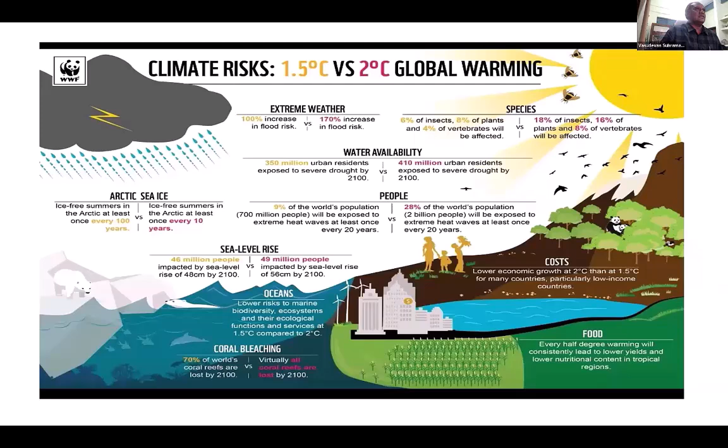In 2100, if you allow global warming, 410 million urban residents will be exposed to severe drought, and also Arctic sea ice melting, and 28% of the world population will be exposed to extreme heat waves and lose their lives, and sea level rise, coral bleaching, and also food and the cost. So if we are not able to go with hydrogen, this climate risk will go ahead. Otherwise, because of hydrogen implementation, you can avoid the temperature rise of 1.5 degrees centigrade and above.

Normally, you can see the natural greenhouse gases like CO2 and CH4 will be a barrier in the earth's atmosphere. Because of these greenhouse gases, our earth is warm enough. That means we need the natural greenhouse gas. But the human-enhanced greenhouse gas is creating the problem, because the CO2 will hold the heat and will not release it. So we need greenhouse gas, but not too much of it in the atmosphere. For example, you can see the sun's energy passes through the car's windshield.

The heat will be inside, so that means you cannot live in the car because of the heat. So the same principle will be in the case of Earth.

Climate change is increasing the frequency and intensity of lightning strikes and thunderstorms, which can lead to more effect in the case of the intensity of lightning. Almost 7.4 to 8 lakh people are dying in the case of the heat wave.

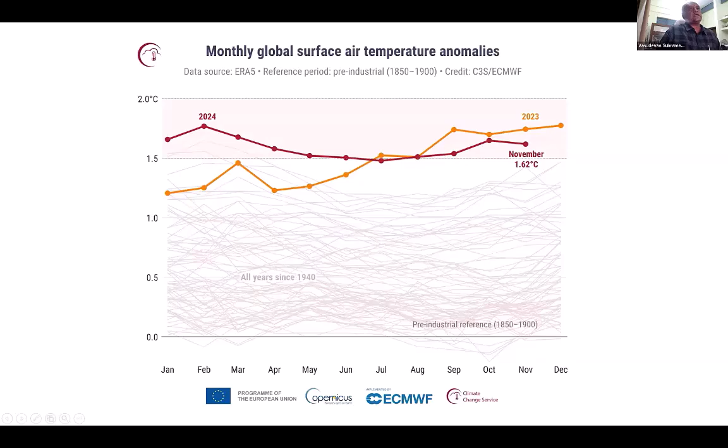So you can see it going on increasing and decreasing. Again, in the case of the November month, the temperature increases 1.62 degrees centigrade because of global warming.

Even if you do not obey this 1.5 degrees centigrade limit, there is formation of this type of atmospheric river. If the atmospheric river happens, there is heavy rainfall in a short time. We have experienced in India and many places this type of burst in atmospheric rivers, causing heavy rain.

So you can see the flood will increase, forest fire will increase, ice melting will increase, and sea level will rise.

These are the consequences we have to face if we are not using green or renewable energy like hydrogen. If you go for green or renewable energy, there are multiple options, like chemical energy storage, for example these type of batteries and advanced chemical energy storage, CO2 battery and flow batteries, and gravitational energy, thermal energy and compressed air energy like that.

But today I am going to talk more about the hydrogen based energy system, particularly how to produce green hydrogen and its application.

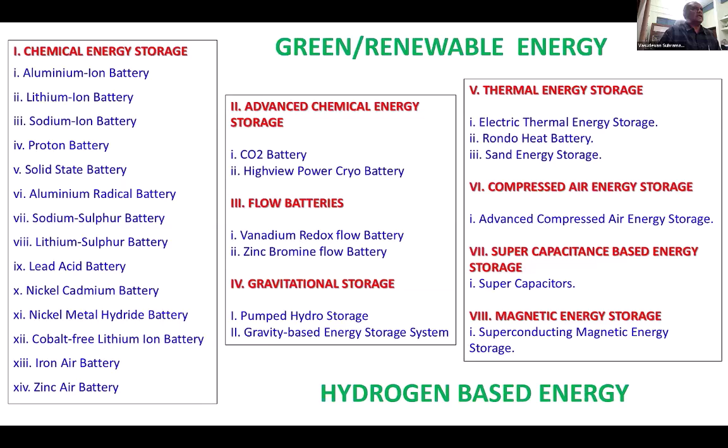Earlier there was a fight between the batteries and fossil fuels. Now hydrogen is fighting with batteries and fossil fuels. Why? Because hydrogen is the magic green fuel. It will be utilized in many places of application.

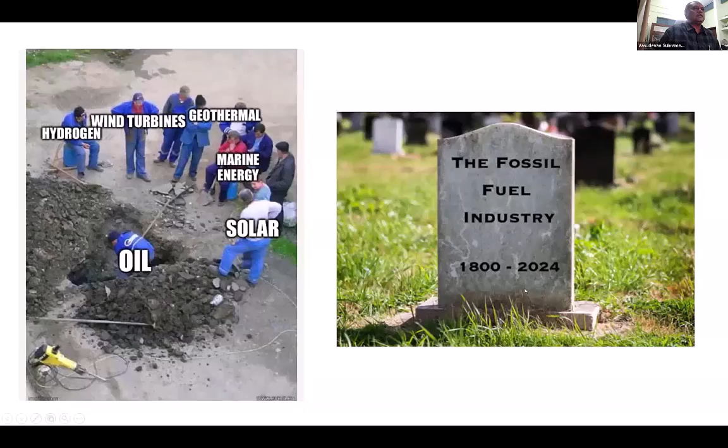So you can see the renewable energies like hydrogen, wind, geothermal, every energy is burying oil. So the fossil fuel industry is almost over. This is from 1800 to 2024.

So beyond 2000, we are completely going towards the hydrogen age. So this is another typical figure.

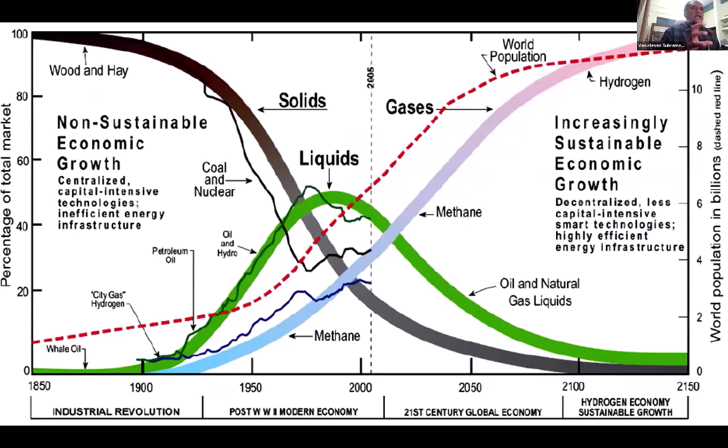You can see solid fuels going on decreasing in utilization, and liquid fuels utilization also decreasing. Only gaseous fuels will be utilized in the future as world population increases. These two graphs predict that hydrogen and other gaseous fuels are the future.

Supposing if you ask one question about renewables like solar and wind - because of the drawbacks like intermittent power supply in both cases, and in the case of batteries, how big you want and what is the capacity, there are so many questions.

That's why we are going for hydrogen energy. Also you can see hydrogen is multifunctional. It connects energy, mobility, and industry.

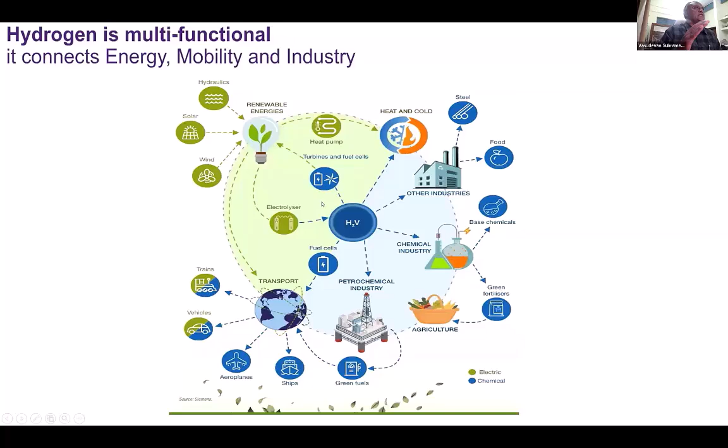So battery can't go for the industrial side. Hydrogen can be used for renewable energy and also green transport and also as green fuel for industry. That's why I'm telling hydrogen is multifunctional. It will always connect energy, mobility, and industry.

Scientifically, you can see that the energy density, that is the gravimetric energy density, is more in the case of hydrogen - it is almost 142 megajoules per kg, more than lithium-ion batteries. You can see the volumetric energy density in the case of liquid hydrogen is also more than lithium-ion batteries.

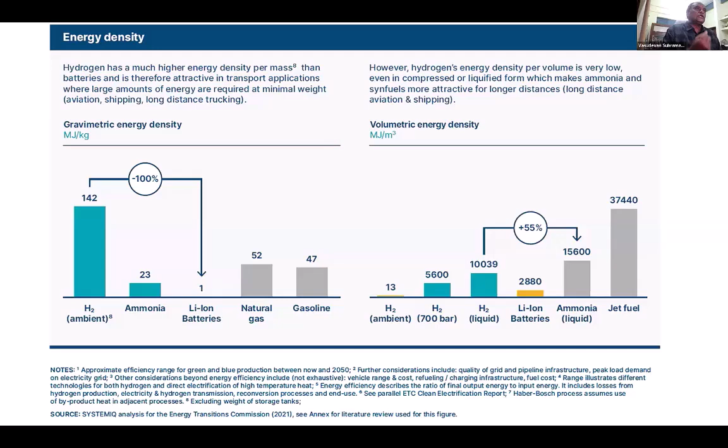You can see the scientific argument of hydrogen versus batteries. Both gravimetric energy density and volumetric energy density are more for hydrogen, so that's why it is an attractive fuel for the future.

There are many methods available for hydrogen production. The hydrogen source can be natural gas, liquid hydrocarbons, coal, biomass, or biogas - these are all the hydrogen source inputs. If you produce hydrogen with these methods, you need carbon capture systems. Natural gas needs CCS too, so in all these cases you have to put carbon capture systems for hydrogen.

But in the case of water, through electrolysis, you don't need any carbon capture systems. That's why the method of producing hydrogen through electrolysis is called green hydrogen production.

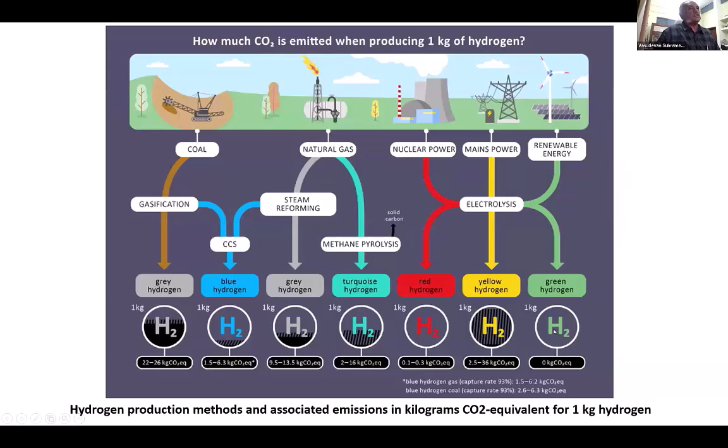If you want to produce 1 kg of hydrogen through electrolysis, there is 0 kg of CO2 equivalent. Cost-wise, there is coal-based, natural gas-based, and green hydrogen-based production. The cost is a little bit higher for green hydrogen, but the water consumption is also less.

Right now the hydrogen cost is more, but because of the reduction in renewable energy cost, the hydrogen cost is going to be less. That I can tell in the future slides.

In the case of electrolysis, there are many possibilities - solar pathways, high temperature pathways, and low temperature pathways. If you go for solar pathways, there is photobiological electrolysis and photoelectrochemical methods available for green hydrogen generation, or solar thermochemical water splitting.

In the case of high temperature, you can use heat from a nuclear source and go for high temperature electrolysis, but here you need very high temperatures like 600 to 1000 degrees centigrade. In the low temperature electrolysis pathway, you can use green energy and the temperature required is very, very low - I can say less than 100 degrees centigrade. So these are all the pathways you can use to produce green hydrogen.

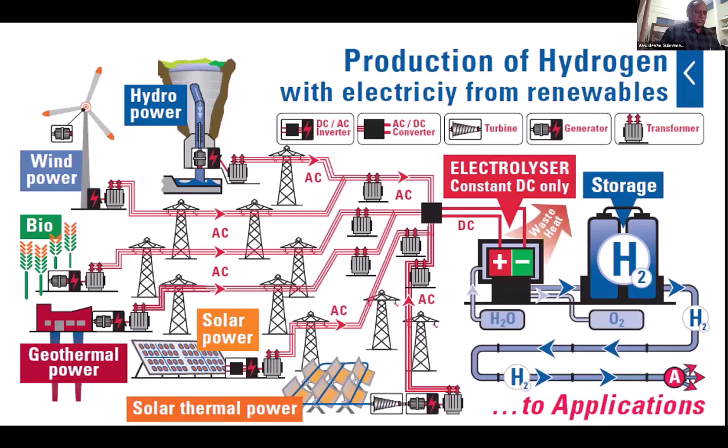There is another option of renewables where there is no electricity involved. I can say this is also called production of green hydrogen, but no electricity is required, though it is renewable. So my point here is that a physicist, chemist, or biologist - anyone can produce green hydrogen through their intelligence.

This is eye-opening for research scholars in any department. Concentrate on this type of hydrogen generation because India needs 5 metric million tons of hydrogen by 2030. If we are not concentrating on hydrogen, it is very, very difficult to survive on the Earth.

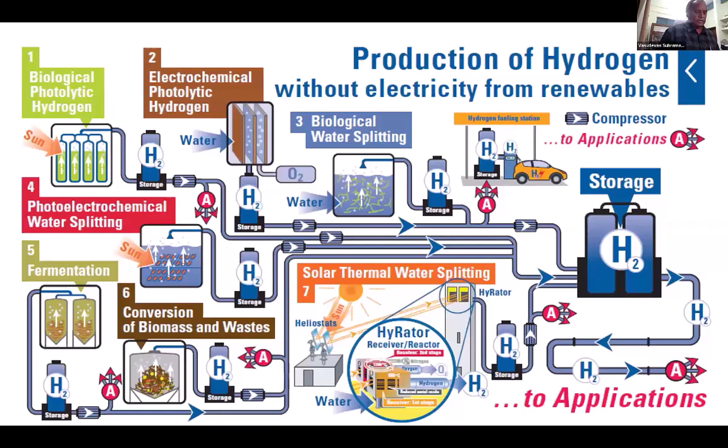Now I can come to what type of catalyst is used in the electrolyzer. Two types of catalysts are used in two types of electrolyzers: one is the alkaline electrolyzer or AEM electrolyzer, and one is the acid electrolyzer, or indirectly the PEM electrolyzer.

In the alkaline side, nickel will be the electrocatalyst in the form of porous or alloy forms, but the base is nickel. In the case of PEM electrolyzers, you can use precious metals like platinum and palladium. Platinum is the natural choice because of the higher exchange current density and very low overpotential at low current density. But the disadvantage is the higher loading required and also the high cost.

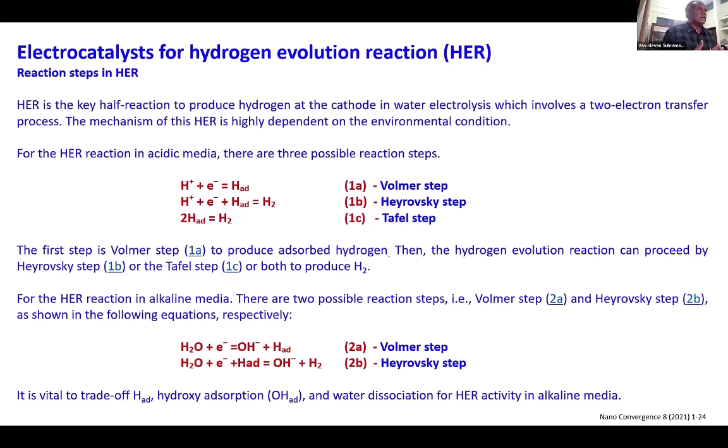Here again, the OER, that is oxygen evolution reaction, takes place on the anode side. Here the overpotential loss is more, that is 40%. On the HER side, the overpotential is less, but on the oxygen side, the overpotential is more, more than 40%. So now people are concentrating more on developing new anode catalysts to reduce the overpotential losses.

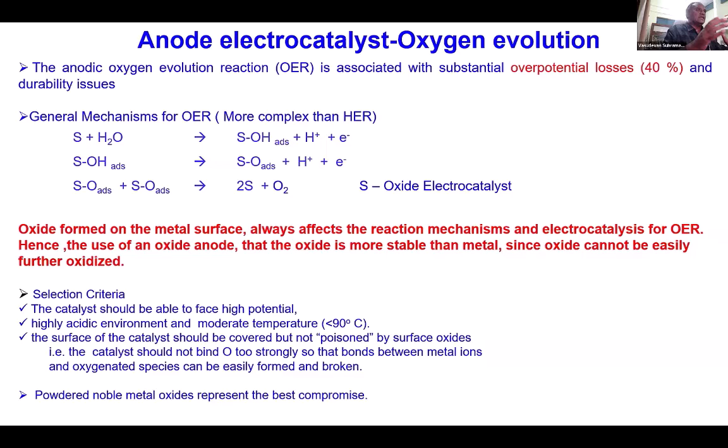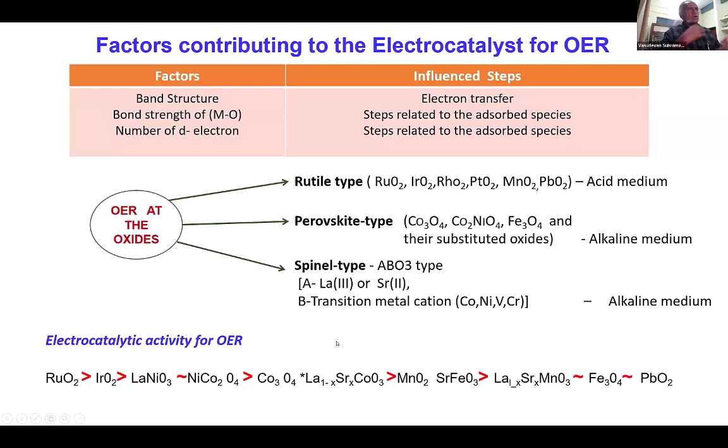And you can see the rutile type, perovskite type, spinel type. So these are all the possible OER oxide catalysts you can go for. The rutile type is used for acid medium, and perovskite and spinel types are used for alkaline medium. From the literature, the electrocatalyst activity goes RuO2, IrO2, like that. Now people are concentrating more on the oxygen evolution reaction than the hydrogen evolution reaction.

So now my point is, iridium is used on the anode side. There is no replacement till date. Small groups are working on it in many places and taking some patents, but in most commercial cells iridium is used. Iridium is one of the rarest naturally occurring elements; only a very small amount of iridium is available. And the catalyst made from iridium and platinum today is typically 65% iridium and 35% platinum.

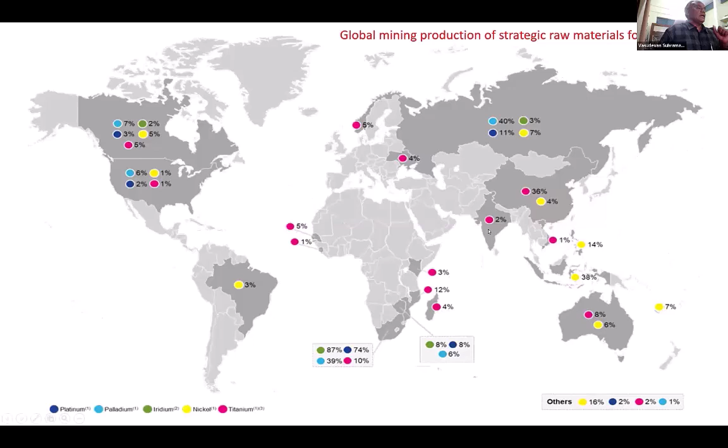So if we are targeting big electrolyzers, we need 20 tons of iridium, but availability is only 8 tons. So we have to go to non-iridium based catalysts in the future. This is one thought everybody has to keep in mind: if you are going to work on PEM electrolyzers, at the anode and the cathode you have to replace iridium and platinum. There are very few resources available in India, but in African and other countries the resources are more. So we have to target the Indian market with respect to the availability of metals in India.

Apart from these catalysts, another part is the current collector. On the hydrogen side, the electrode potentials are close to zero, so it is possible to use carbon-based materials such as carbon papers. But on the oxygen side, you cannot use carbon-based material because carbon corrosion takes place. So this is big research for the mechanical engineering department, to make proper current collectors, porous titanium structures replacing carbon, in the PEM electrolyzer. Chemistry can handle the anode and cathode catalysts; mechanical can take the challenge of these current collectors.

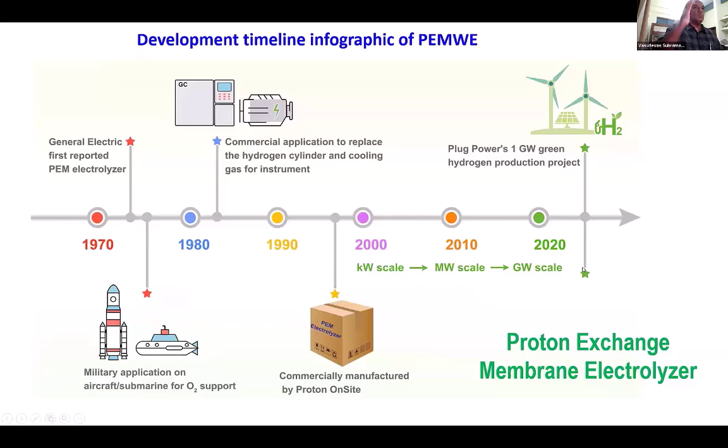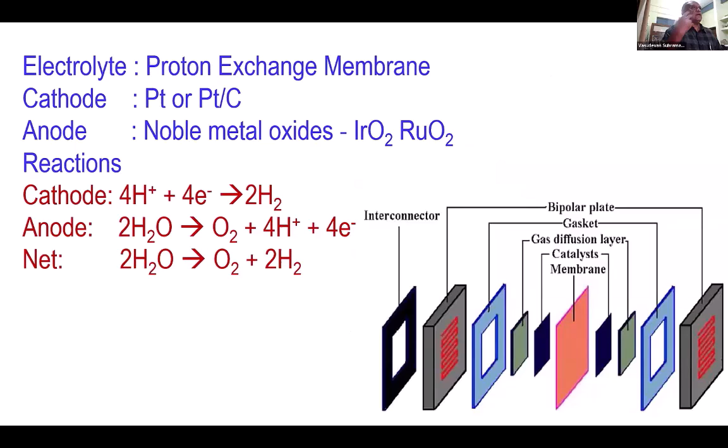So the PEM electrolyzer started in 1970 and has progressed step by step. Around 2020, kilowatt, megawatt and gigawatt scale started, because we need more green hydrogen; we have to go to megawatt scale. The fundamental is the proton exchange membrane electrolyzer, and CECRI is concentrating more on PEM electrolyzers. This is the membrane where water is split to the oxygen and hydrogen sides. The electrolyte is a solid proton exchange electrolyte, water is the reactant, noble metals are used, and hydrogen and oxygen are evolved.

In CECRI, we have made several examples. I can say more than 1,000 catalysts we prepared based on the carbon, and finally we optimized with the carbon-based platinum. This is one type of catalyst developed and patented by CECRI, and another one is the platinum, to how to reduce the platinum content in the cathode side. This is the typical method we are using, the deposition method.

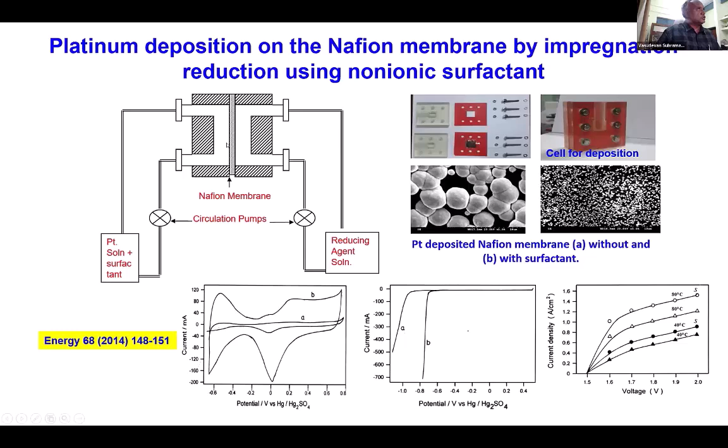How much platinum is required? So based on the performance, we can reduce the platinum content through the deposition method. In the case of the oxide side, we are still using the IrO2-based system only. I can say that we are still struggling to replace the IrO2-based catalyst, but slowly we will go to less IrO2-based catalyst.

So this is the first prototype developed in the years 1996 to 2000. It will generate only 0.02 meter cube of hydrogen. Here you can see there are membranes and both anode side and cathode side. As I said, these are all the current collectors and current distributors. So a very compact electrolyzer cell.

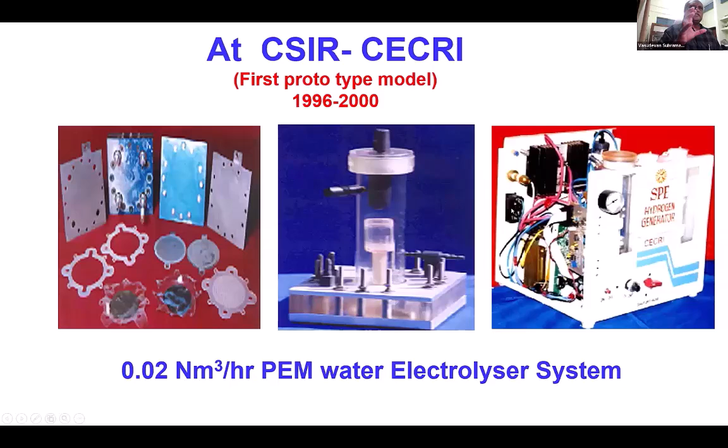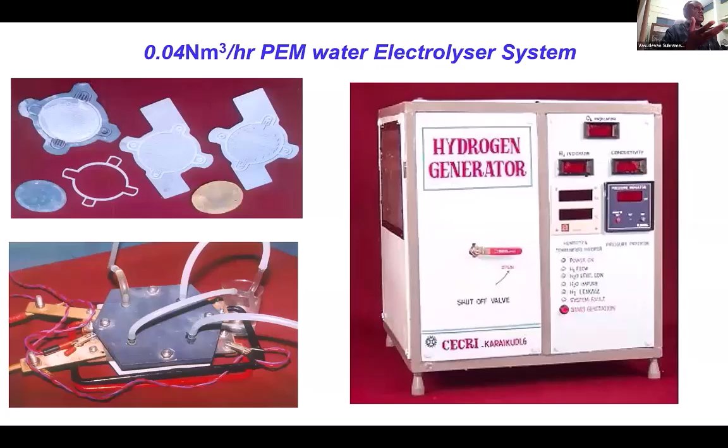Even though the green hydrogen concept started recently, we started in the year 1996 itself. So this is the first green hydrogen prototype model developed in CECRI in 2000. We did several performance tests like current, voltage, and duration. Apart from the knowledge based on the 0.02, we went a little bit higher. We were successful in this also, and then we went to 0.8 Nm cube. Here also we were successful, and we went for the complete system.

Here this is 1 meter cube of hydrogen, where it can produce 1,000 liters of hydrogen through the PEM electrolyzer. Earlier we made small things. Now we are able to make bigger size systems. In the case of the PEM electrolyzer, we have a lot of students working on this project. Apart from that, we also made separate cells for 2,000 liters, 3,000 liters, 4,000, and finally now in 2024, with great difficulties, we are able to do 6,000 liters of hydrogen.

In the future, within 2 to 3 years, we are planning for 20 to 25 Nm cube of hydrogen. We are getting projects from CSIR and MNRE for the higher scale studies. So these are all the technical specifications. We are on par with the international market. The thing is, once you have developed it, you cannot keep the technology to yourself.

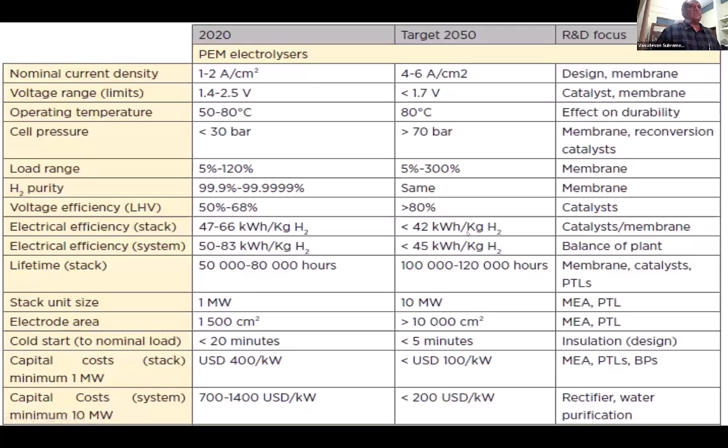Now we are utilizing our electrolyzer using solar as the energy source, because if you are not generating the hydrogen through solar, it is not green energy. We have started working on solar-based hydrogen energy. Still, the R&D focus will be there in the design of membrane, catalyst, and durability. So much R&D focus is needed to achieve the target of 2050. The Department of Energy, DOE, has given a very high target to achieve in 2050. CECRI is going towards the 2050 target.

So it is the integration of all the departments, like a private university has all the departments. So if you bring all the departments together and sit and work on that, definitely India can go for this type of electrolyzer system.

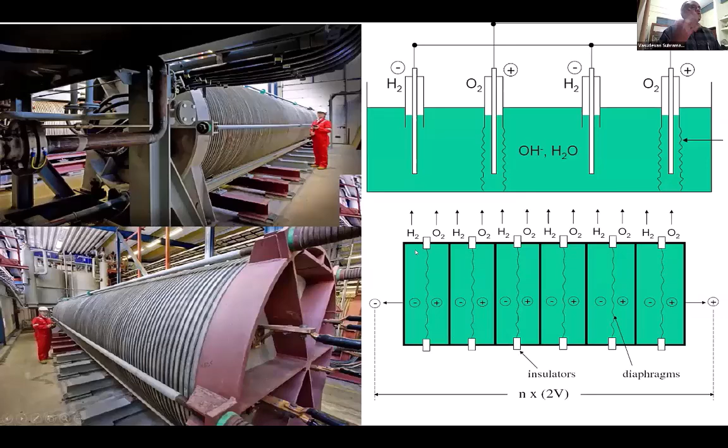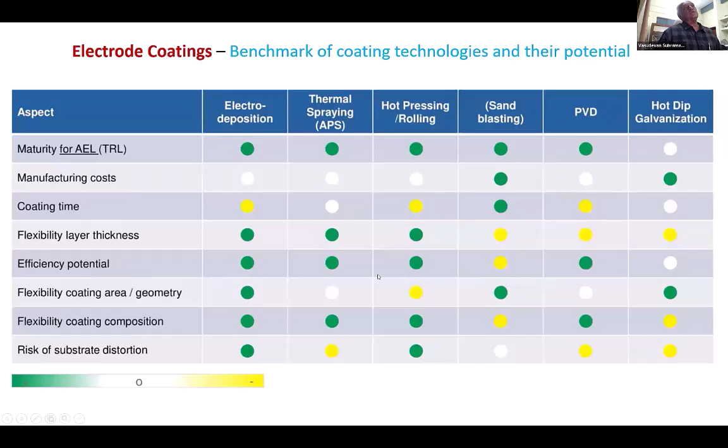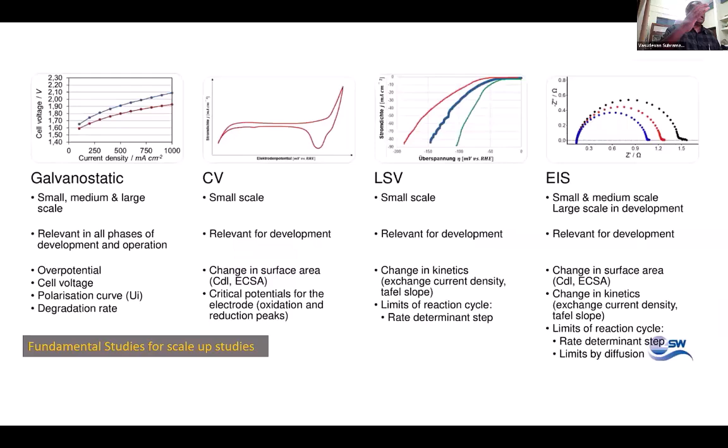So before going to pilot scale, you have to do many fundamentals like galvanostatic studies, cyclic voltammetry, linear sweep voltammetry, impedance studies. So if you want to develop the catalyst, you have to go for this type of characterization. And the question is whether nickel is available; yes, plenty of nickel is available. That's why now the world is concentrating on the alkaline electrolyzer rather than the PEM electrolyzer.

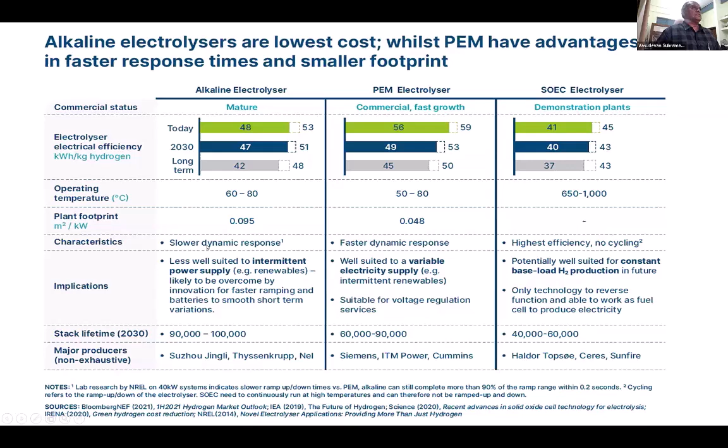And another question is whether water is available for alkaline. Even in the case of many hydrogen production systems, water is needed. Like that, you need water for the hydrogen system. Enough water is available for the electrolysis of water.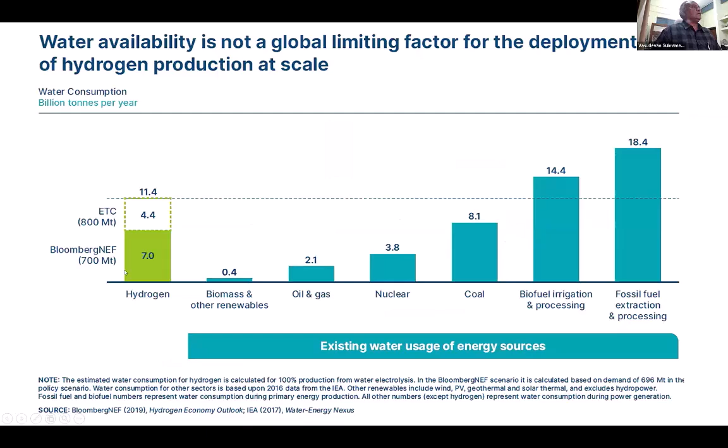So initially, in the case of the alkaline electrolyzer, we developed only the electrode rather than the electrolyzer. After the development of the indigenous electrode, the technology was immediately transferred to the existing electrolyzer manufacturer. Then we started our own electrolyzer system with many components. We developed the 5 kilowatt system as a demo model, and now we are going for the 50 kilowatt alkaline electrolyzer. Like PEM, here also we need the entire system, like balance of plant and the electrolyzer. Here also all the engineers and scientists will work on this type of system.

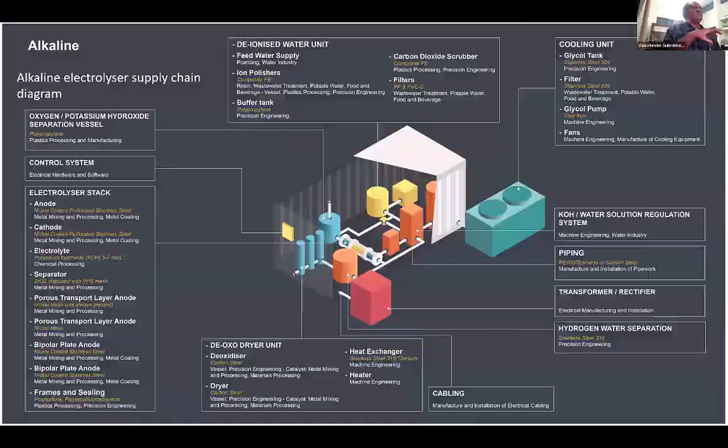Here we are not at all working on high temperature electrolysis. As I said, here we need high temperature; if waste heat is available, then you can go for high temperature electrolysis.

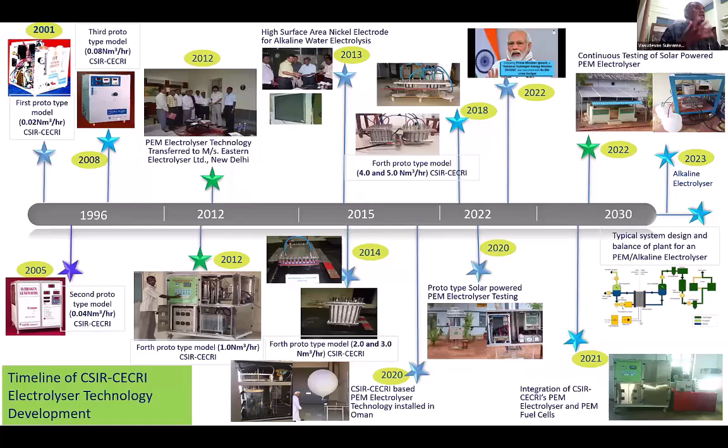Here also the same. So you can see the timeline. We started in 1996. We have been slowly developing through 2012, 2015, 2022, and into the 2030s. We are going to meet India's requirement of 5 MMT of green hydrogen. So this is the timeline. It is not just like that we started this work. It is 30 years of work we have done on the PEM electrolyzer system.

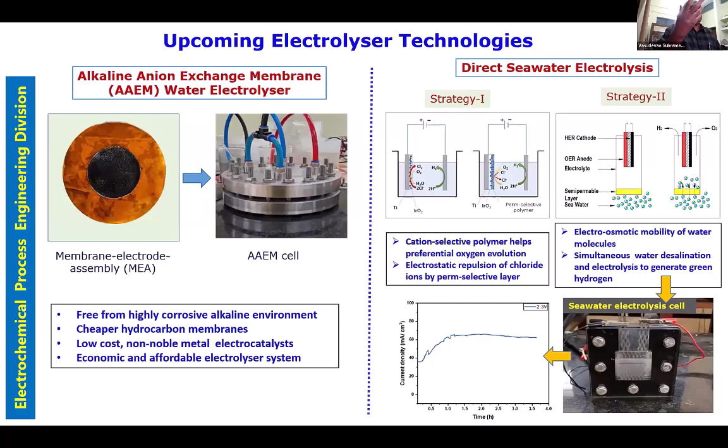Apart from PEM, we are also concentrating on replacing the 30% KOH with an alkaline anion exchange membrane. Like PEM, here also you can use the AEM, you can use water, and we are also doing direct seawater electrolysis. If plenty of seawater is available; now CECRI is concentrating on this type of new system for hydrogen generation. So you can generate hydrogen from seawater, either desalinated or direct seawater.

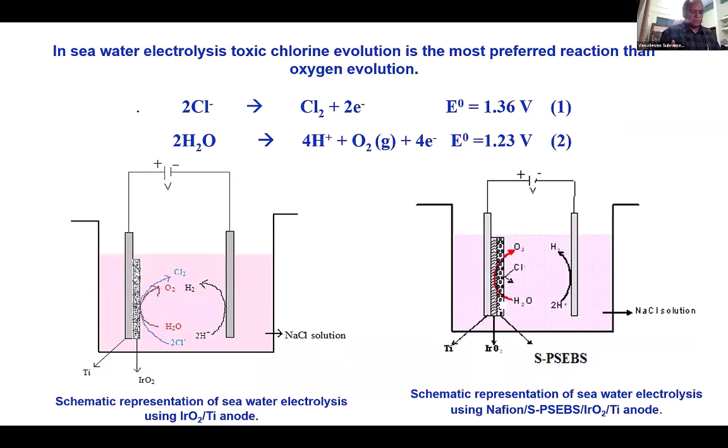So if you want to use seawater, chlorine is the main problem. So you have to avoid chlorine evolution on the anode side. This type of approach for seawater electrolysis is going on. If you use seawater, you get only chlorine. This is not an environmentally friendly technique for utilizing seawater for electrolysis. For that, we are concentrating on replacing chlorine evolution and making oxygen evolution take place in seawater electrolysis. We are doing much research on this.

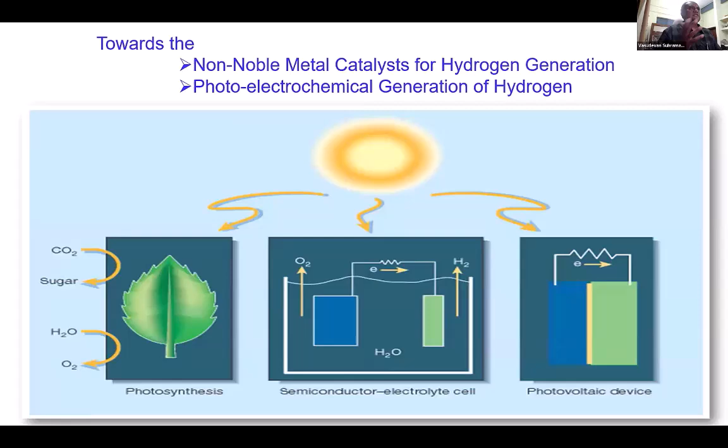We are publishing many papers, and we have achieved 90 to 100% oxygen evolution, and decreased chlorine evolution to almost zero. We are successful in the case of seawater electrolysis. And as I said, to replace the precious metals, we are also going for non-noble metal catalysts and also photoelectrochemical generation.

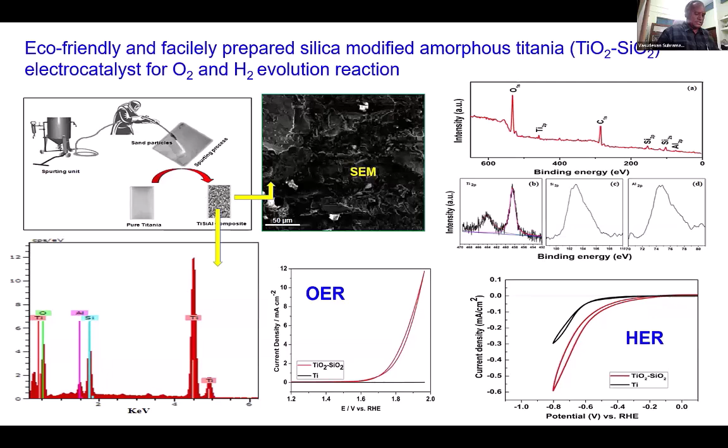Like that, we used alumina as the source. In place of sand, if you use alumina, you can get the TiO2-Al2O3 catalyst. This is also another method of invention and a non-noble catalyst. So we are trying these types of new methods and new catalysts for the photoelectrochemical process.

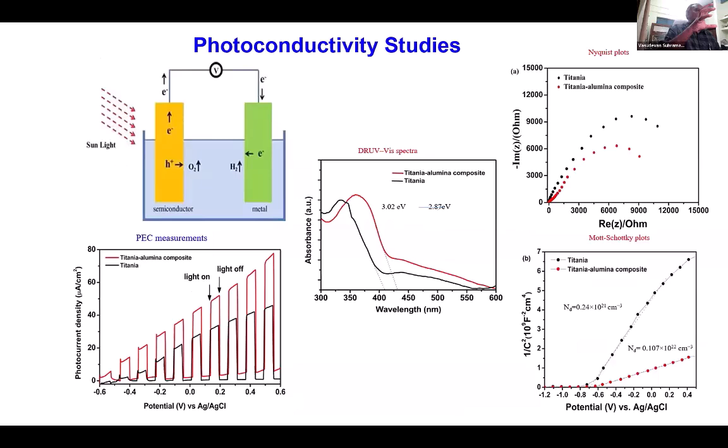Here we are also trying carbon and nitrogen co-doped TiO2 photoanodes, that is, non-metallic TiO2 photoanodes. Apart from the electrolysis method, as I said in the previous slides, we are also concentrating on alternate methods like seawater electrolysis and AEM electrolysis, and also completely replacing the entire system with photoelectrochemical methods. So like iron oxide-TiO2, Al2O3-TiO2, there are many methods available to prepare catalysts like this.

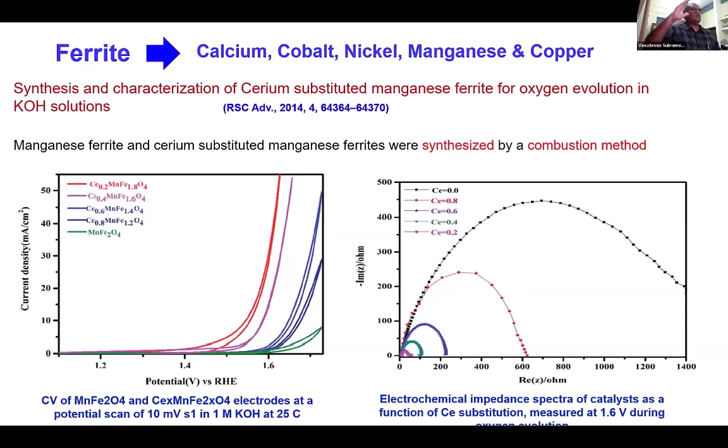For example, as I told in earlier cases, India is rich in iron. So you can go for ferrite, iron-based catalysts for the alkaline side. Calcium ferrite, cobalt ferrite, there are many ferrite, iron-based catalysts now booming on the Indian side, so that you need not depend on other countries for iridium and platinum. So from that angle also, we are proceeding with our research.

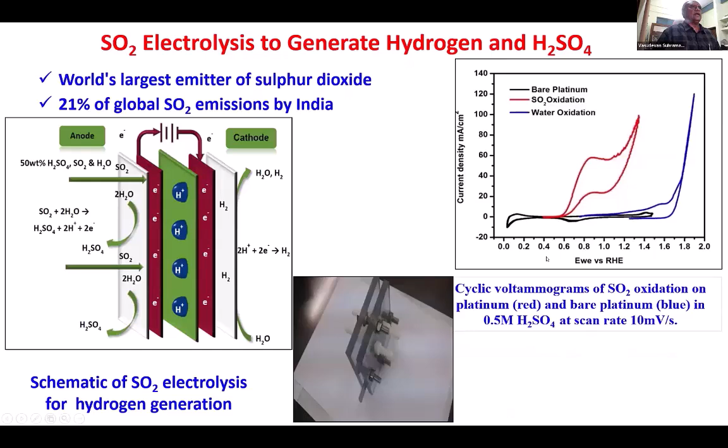Around the world, many companies have started in alkaline and PEM electrolyzers. Whenever you go for new systems, there is a danger. If you use a hydrogen system, in many places accidents take place. You have to be more careful about that.

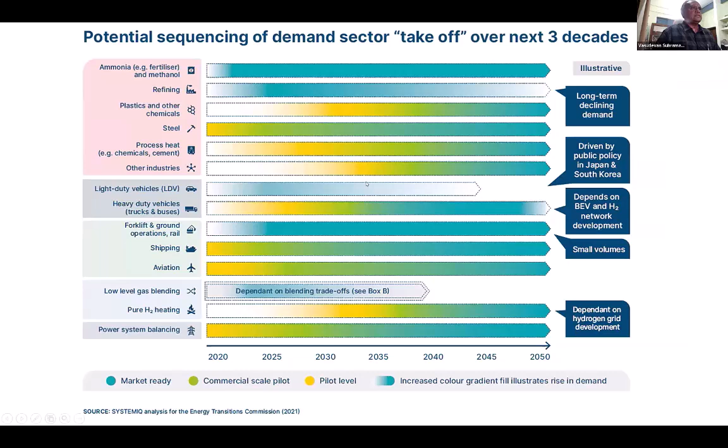You can see the utilization point of view. Here you can see the long term and immediate use. You can see the industries which are immediately using hydrogen and those industries expected to use hydrogen in the future. So India and other countries have started utilizing hydrogen. You can see the steel, shipping, fertilizer and aviation industries are utilizing it.

Somebody will think that the use of green hydrogen would have a significant impact on the price. But the impact on the intermediate product in US dollars is less, and the impact on the end product is very less. In the case of industries like steel, shipping and others, the impact on cost will be very less. This study has taken place in many places.

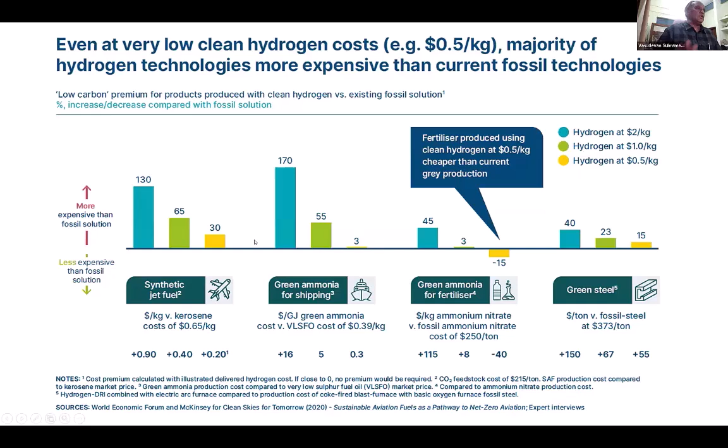You can see one example, fertilizer produced using clean hydrogen at $0.5 per kg. The impact is minus if you use the Haber process. In the case of ammonia fertilizer, the impact is less. So this is the concept we want. We want hydrogen production at a lower price so that the impact will be on the negative side. So now people are going towards the negative impact side.

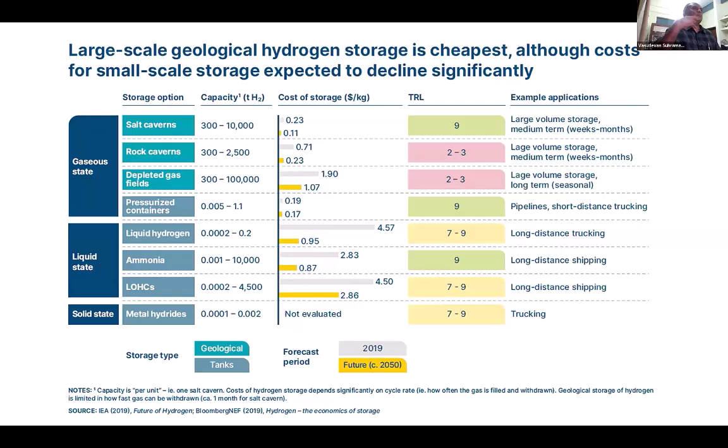And now I come to the general and future viewpoint of hydrogen. Already, China has started a commercial fuel cell powered line. And ZeroAvia has already started in aviation.

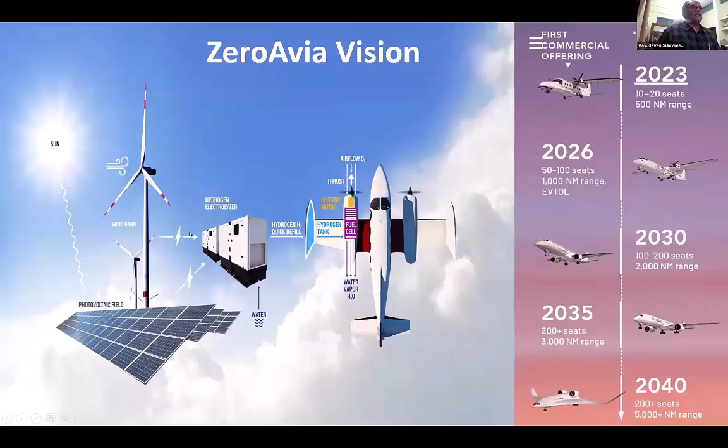In 2040, there are 200 plus seats of ZeroAvia, that is zero carbon aviation, will be available in 2040 to 2050. The thing is, we want more space to accommodate this type of hydrogen system. And Berlin already started the Berlin airport with the complete hydrogen system. You can see the electricity, hydrogen generation system, hydrogen storage system, and also getting the electricity from the fuel cell to the grid. So this concept already started in many places.

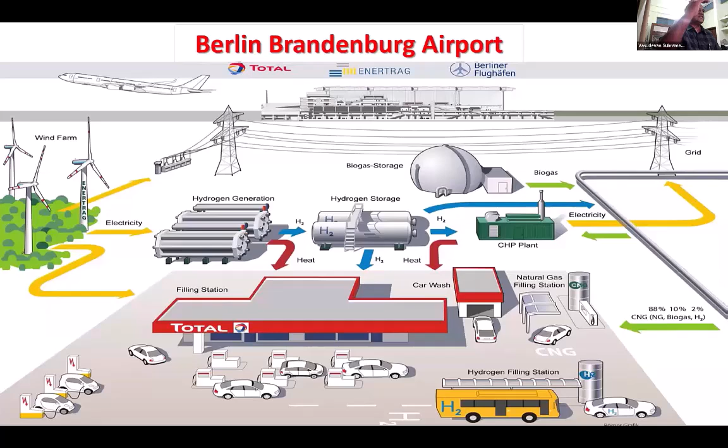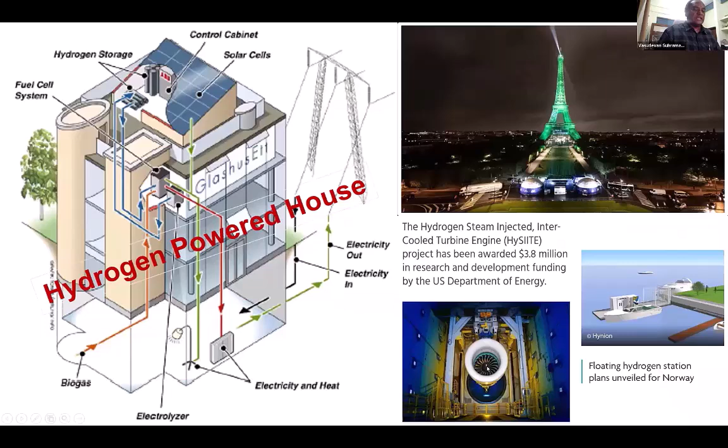The airport is zero CO2 emission. Even in the aircraft and the airport, there is no CO2 emission in the air. That's why this is the way you have to reduce the surface temperature to less than 1.5 degrees centigrade. The hydrogen powered houses are started. Even the hydrogen based engines for aircraft were started.

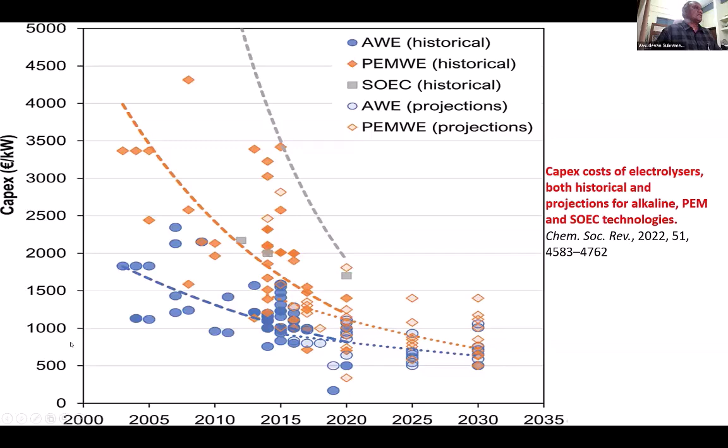And this is the capex cost of electrolyzers, both historical and projection, for alkaline electrolyzers. So the capex, the capital cost, is decreasing towards 2035. The capex cost will be very low in the case of all electrolyzers. So here the size of individual commercialized electrolyzer plants is increasing.

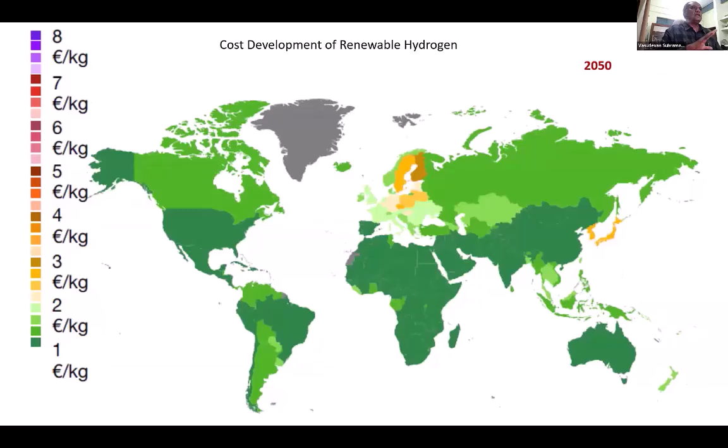And in due course, in 2030, we are expecting the cost to be 3 euros per kg. And in 2040, I can say 1 euro or $1 of hydrogen per kg all over the world. In 2040, the cost will be less than the carbon-based, coal-based fuels. In 2050, almost all countries will produce hydrogen at lower cost. Do you think it is possible to reduce the cost of hydrogen very easily?

No. Suppose you take the example of 4.9 US dollars per kg. Suppose I want to reduce at least $1, meaning 3.9. I have to concentrate on electrolyzer efficiency, decrease of the cost of renewable power and capex, increase in the life of the electrolyzer, and decrease the operating and maintenance costs. So I have to take care of these things. Only then can I reduce 60%, 50%, 0.9, so I can reduce only $1. So we have to be concentrating.

If you want to make $1 per kg, you can assume how much work you need. Suppose if you want 1 million tonnes per year, you need 10 gigawatts of electrolyzer, 20 gigawatts of renewables, and an investment of $30 billion. That is 1, 10, 20, 30. You can keep it in mind. We want to reduce this 30 to less than 20.

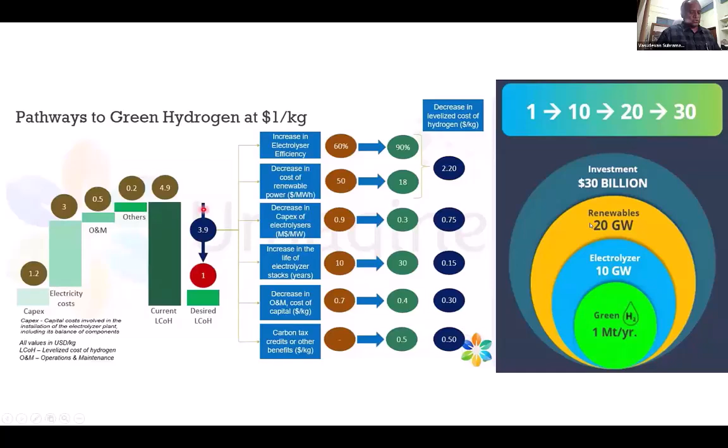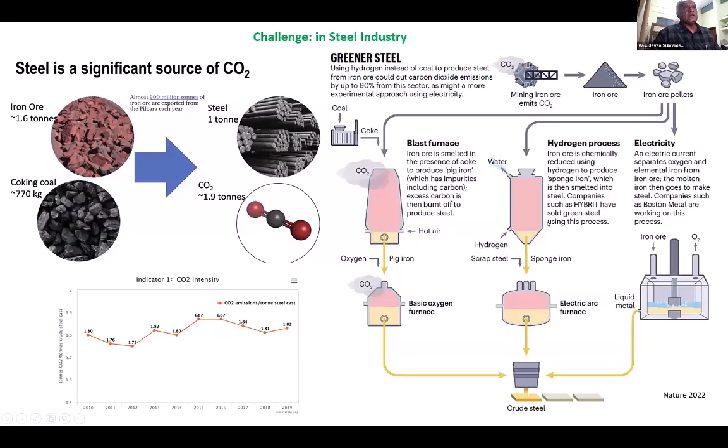The alternate method is you can go for the hydrogenation process or the electrochemical process so that you can avoid the CO2, because if you use 1.6 tons of iron ore to produce 1 ton of steel, you are generating 1.9 tons of CO2. If you avoid this type of CO2 emission, you can utilize green hydrogen for the hydrogenation process. As I said, this is not a very simple process.

You need fluid mechanics research, chemical research, material science research, and also electric and electronics expertise. So all this type of integration is required for green hydrogen in the world.

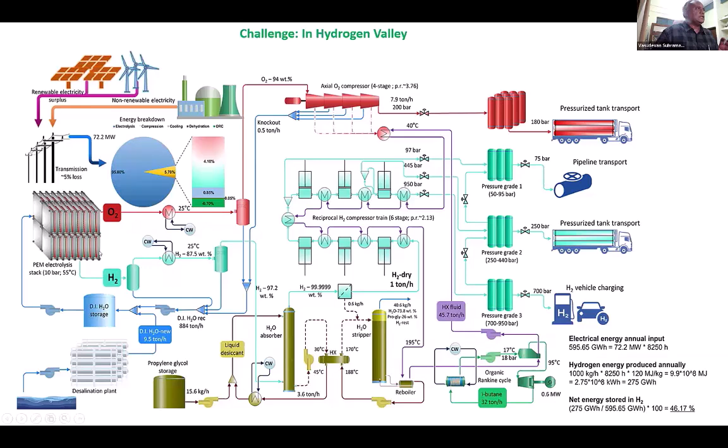So now India has started making the India Hydrogen Valley. Here we are making hydrogen from renewable sources through electrolysis, storing it, making pipelines, considering the cost and other factors, and utilizing it. This type of hydrogen valley has already started in India, particularly in Varanasi and many other places. This hydrogen valley has started, and CSIR's contribution is in the production side.

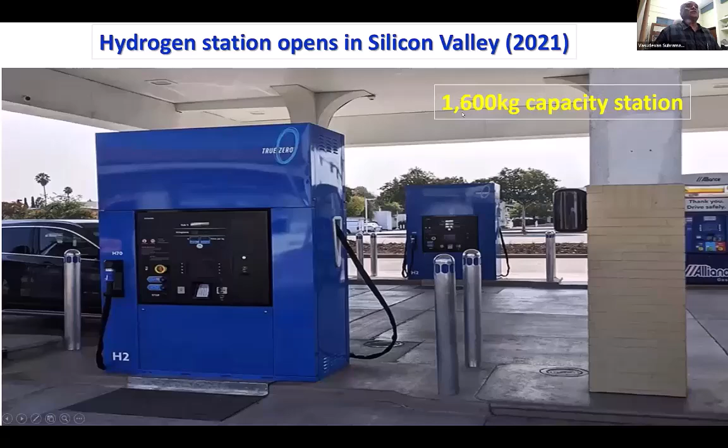You can see almost 1,600 kg capacity hydrogen production started in Silicon Valley in 2021. Now in 2024, a 3,000 kg capacity station was started.

So the hydrogen economy challenges include marketing challenges, technological challenges, fuel processor and safety management, which is very important, and regulatory and stationary approval. So now I can come to hydrogen energy in India, in what way and how India should proceed in hydrogen.

So we are going towards Viksit Bharat by 2047. As our Prime Minister told today, the goal of the country is Viksit Bharat. We cannot stop until this dream of developed India is fulfilled.

You may know that India International Science Festival 24 is going on, focused on transforming India into a science and technology driven global manufacturing hub.

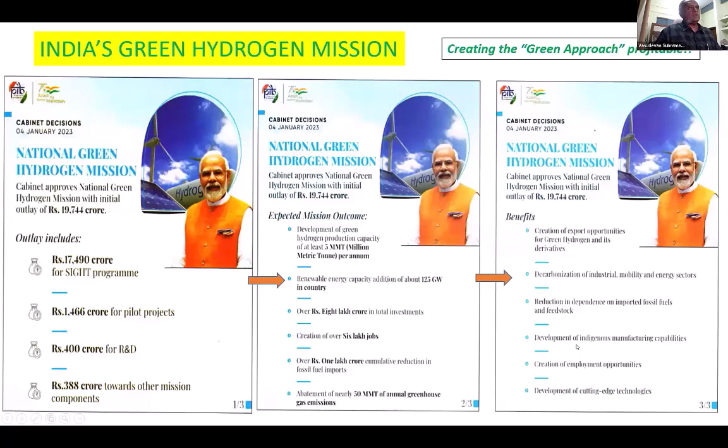So in this concept of Viksit Bharat 2047, the green hydrogen concept is going on in India. Already India's National Green Hydrogen Mission has started. They have given almost 20,000 crore rupees for hydrogen, allocated across many disciplines. For R&D also, they have given plenty of funding for this green hydrogen mission.

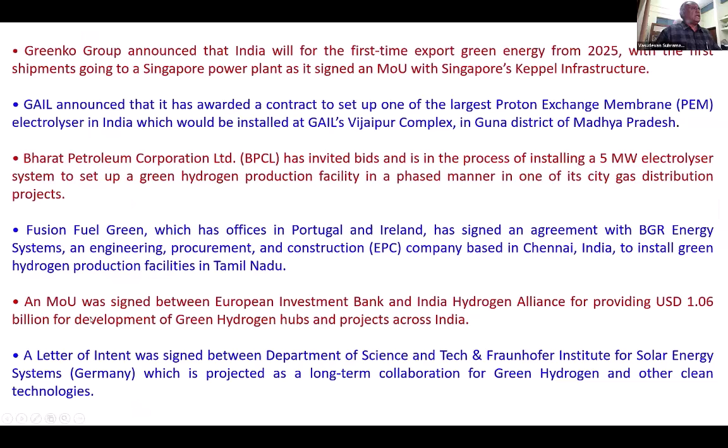Already commercial scale green hydrogen, clean hydrogen production has started, with L&T, Reliance, Indian Oil, Chennai Petroleum Corporation, Greenko, GAIL, Bharat Petroleum, Fusion Fuel, and many industries involved in green hydrogen production. With these industries, CSIR is collaborating in many places.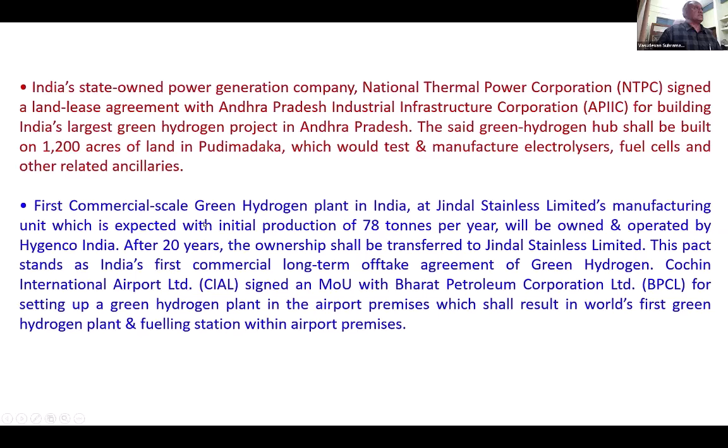I can say that very recently, just 2 days back, MNRE gave orders to these industries to produce a certain amount of metric tons of hydrogen per annum through green hydrogen systems. This shows that India is moving towards addressing climate change and building a green hydrogen manufacturing system.

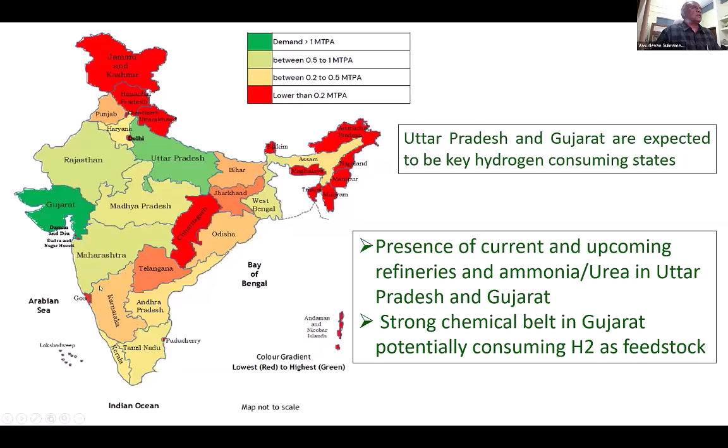Now, Uttar Pradesh and Gujarat are expected to be the key hydrogen consuming states. The presence of current and upcoming refineries, ammonia and urea plants in Uttar Pradesh and Gujarat, and the strong chemical belt in Gujarat, will potentially consume more hydrogen. Apart from Gujarat, you can see all other states also making use of hydrogen.

We need renewable capacity to produce green hydrogen. In 2023, almost 172 gigawatts of renewable energy capacity was available. We want 100 gigawatts of energy to achieve 46 gigawatts of electrolyzer capacity. So, in parallel, we are building renewable energy and hydrogen energy systems together.

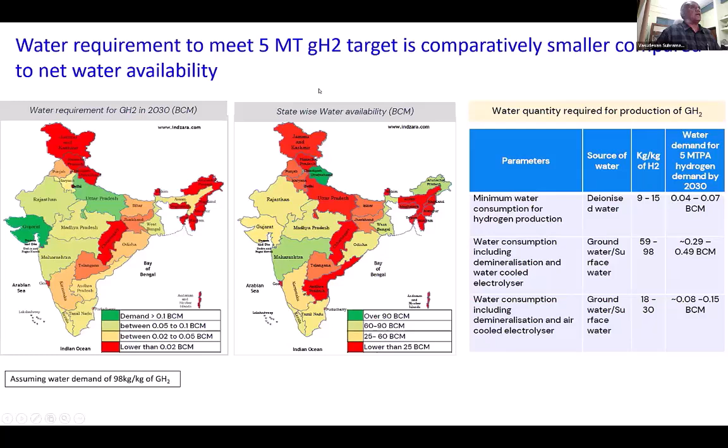Once again, the water requirement to meet the 5 million ton hydrogen target shows there is no water scarcity in India to achieve the 5 million ton hydrogen target by 2030. You can see the green hydrogen versus gray hydrogen cost comparison.

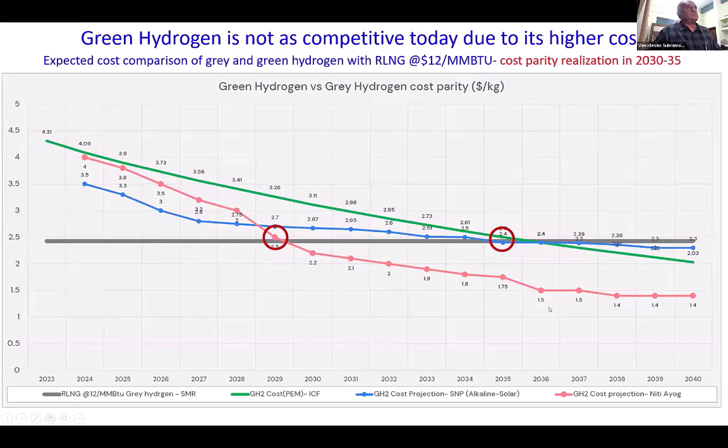NITI Aayog has given a target of $1.5 per kg for hydrogen, but we are currently at $2.34. NITI Aayog will bring this to 1.4 or less than US dollars per kg of hydrogen by 2040. But because of renewable energy, the cost is going on decreasing, which shows the positive sign of green hydrogen generation at cheaper cost.

Considering carbon pricing and MNRE incentives, the cost will still be less in the case of grey hydrogen. If you give the incentives or carbon credit, ultimately the hydrogen production cost is predicted to keep decreasing.

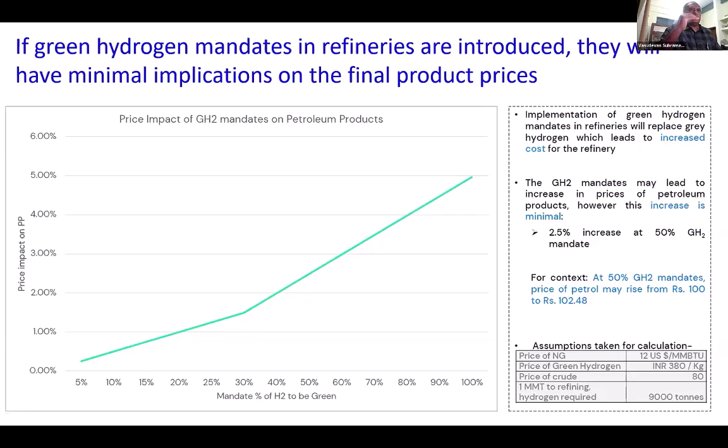So suppose if green hydrogen mandates are applied in refineries, is there any price increase in petrol price? For this, at 50% green hydrogen mandate, the price of petrol may rise from rupees 100 to, 102.48. The increase is very, very minimal, only about 2.5%. If the mandate is for green hydrogen in natural gas or petrol, the cost will be low.

But in the case of ammonia production, government support will be required.

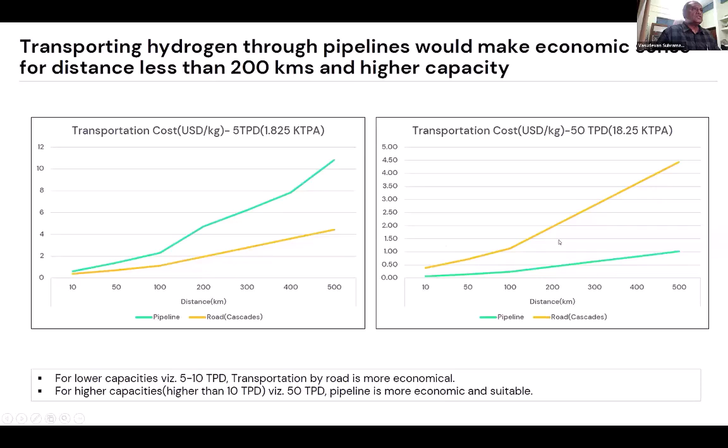For transporting hydrogen through pipeline, there are two graphs: lower capacities are more economical by road transport, but for higher capacities, pipeline is more economic. These types of research are also going on in the transportation sector.

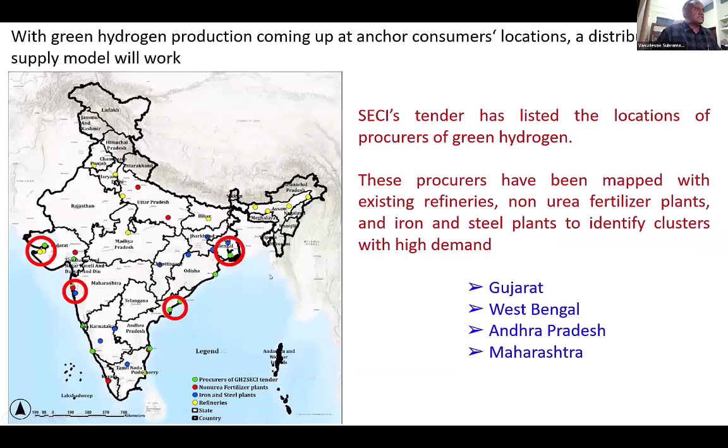These procurers have been mapped with existing refineries like Gujarat, West Bengal, Andhra Pradesh, and these coastal states are well suited for hydrogen demand. Gujarat in particular has a biotech cluster, along with engineering, ceramic, chemicals, petroleum and pharma industries clustered together. That's why Gujarat has more demand for hydrogen than other states.

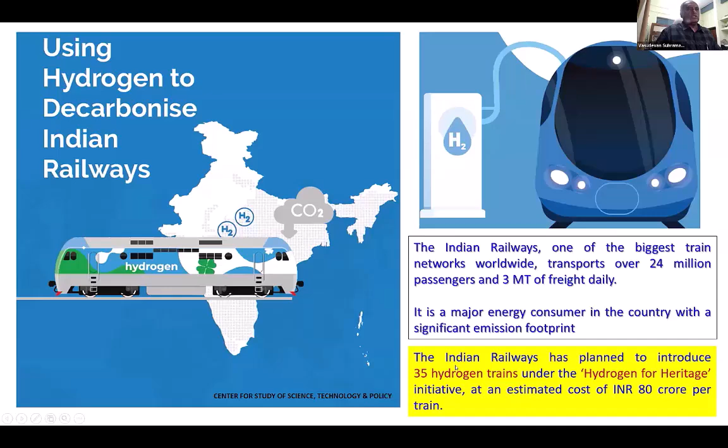In the case of Indian Railways, one of the biggest train networks worldwide, it transports over 24 million passengers and 3 MT of freight daily. Now the concept of hydrogen for heritage trains has already started.

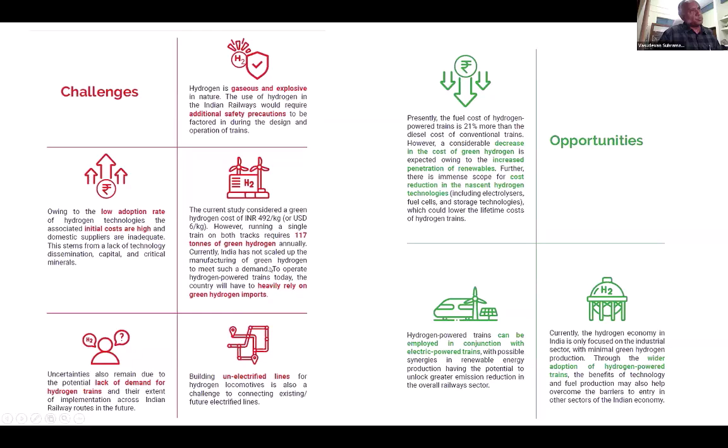There are many challenges and opportunities for green hydrogen. The initial cost is high, there are safety precautions, and heavy reliance on green hydrogen imports. But the advantages and opportunities are more than the challenges.

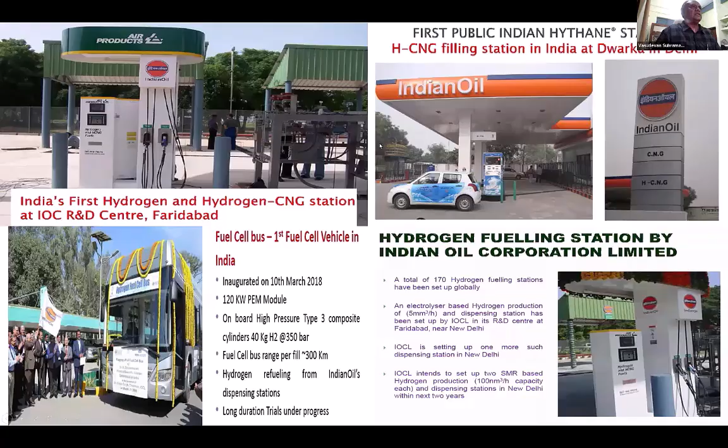India has already started many initiatives: India's first hydrogen CNG station was started, and the hydrogen CNG filling station in India was launched. At CSIR-CSMCRI, we have made hydrogen-based cars and hydrogen-based buses utilizing hydrogen-based fuel cells and also the electrolyzer.

So coming to the final point, as an environmental chemist, I looked at whether hydrogen gives a warming effect. I can say that hydrogen is also contributing to the warming effect in the atmosphere because of leaks.

In production there is a possibility of leak, in compression and storage there is a possibility of leak, in distribution there is a possibility of leak, and in application there is a possibility of leak. So hydrogen is a leak-prone gas that leads to potent climate warming in the near term.

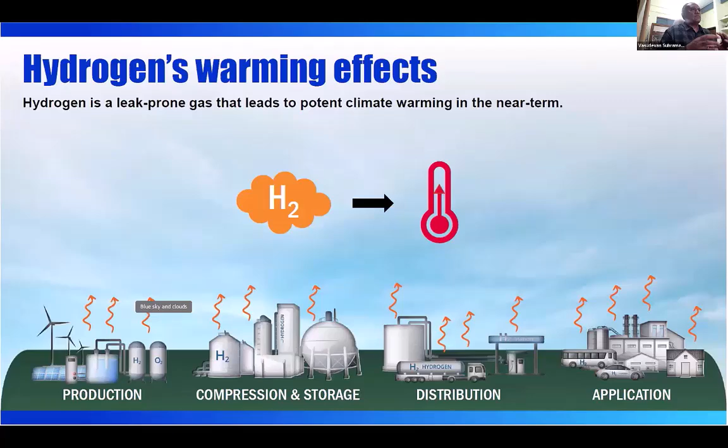So it is not necessary to assume that producing hydrogen will not give heat. If you are not following certain norms, I am sure hydrogen also contributes to warming, because it reacts with the OH ion to produce methane and also ozone. So at high altitude, water vapor will be increasing, meaning that in the atmosphere, as I said, this effect will be formed.

You have to take precautions when producing, utilizing, and transporting hydrogen. I am sure hydrogen will not produce a warming effect, but it will when you are careless. So as an environmental scientist, I can argue that hydrogen is warming, but as a general scientist, I can say hydrogen is a non-warming method. So there is a conflict between environmentalists and energy scientists, and the warming effect will take place. With this, I can end with a quote.

In 1874, Jules Verne stated: I believe water will one day be employed as fuel, so that hydrogen and oxygen, which constitute it, used singly in the case of a system or together in the case of a fuel cell, will furnish an inexhaustible source of heat and light of an intensity of which coal is not capable. Jules Verne gave this statement in 1874, and now we are realizing it.

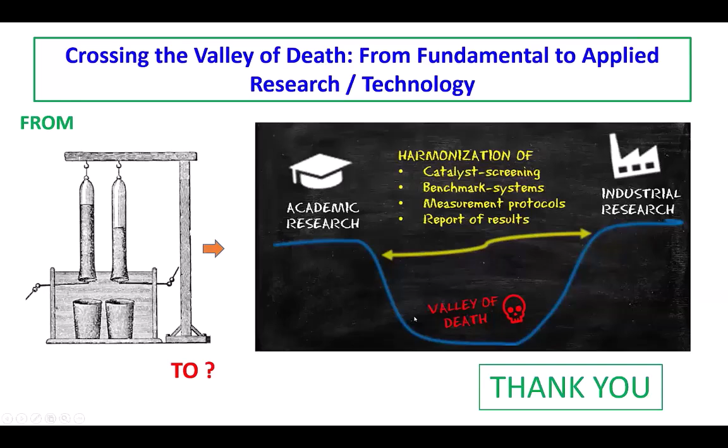Professor, I am a beginner. Where can I start hydrogen research? My answer is you can start - I don't know in which area, whether mechanical engineer, chemist, physicist, or biologist. But in their field, they have to read more on electrolyzers or hydrogen research to see where they fit. In the case of electrolyzers, they have to start with the catalyst, and many other components are also available. So depending upon the field, they can start hydrogen research.

In the case of mechanical engineering, current collector bipolar plates are very, very important. People are still using titanium and stainless steel in electrolyzers. But as a mechanical engineer, you can go for composite materials - less weight, but electrical conductivity equivalent to metallic. This is why the technology is very difficult. If you are able to make composite material equivalent to metal, it would be very useful for electrolyzers in the mechanical engineering department.